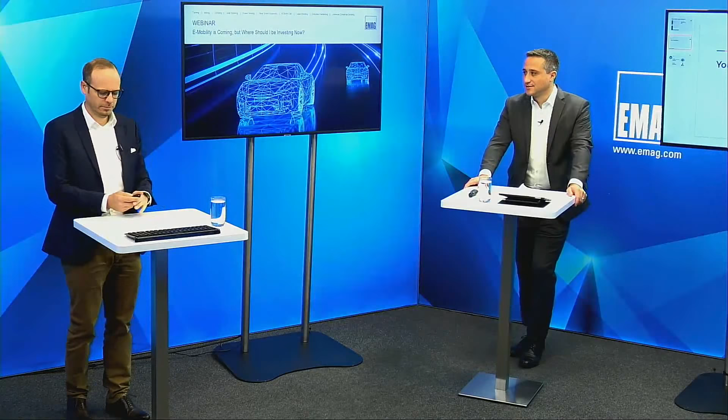Thank you, Nico. So also a very warm welcome from my side. And I will go through the agenda about the development of the E-Mobility. Part of the E-Mobility is the rotor shaft, the stator housing, as well as the E-drive transmission parts. And we will also have an outlook on the brake disc.

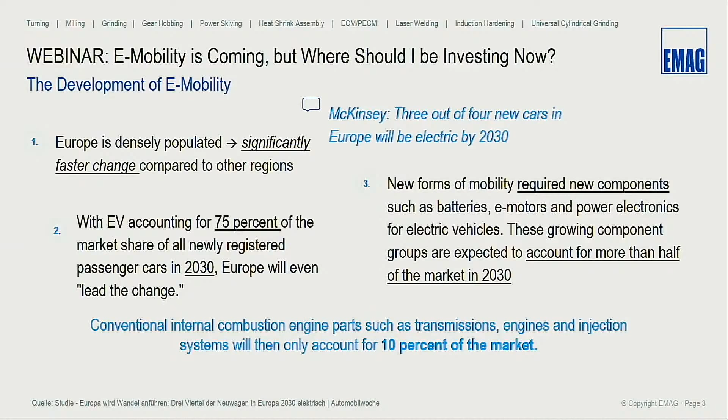What McKinsey is saying is that 75% of the market in 2030 will be electrical cars. So there will be a fast change from the current engine to E-Mobility, the main components of which are the batteries, the e-motors, the power electronics, and so on. And this will be half of the market in 2030. As you maybe know, for example, Mercedes-Benz already stopped their developments for conventional engines, so they will focus definitely just on going to E-Mobility.

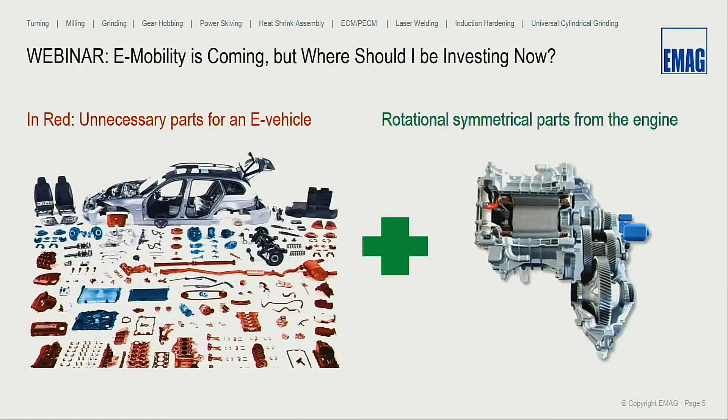So we will give you now the overview of what EMAG can supply you there. The electrical motor has the relevant parts of the stator, the rotor, the stator housing, as well as the transmission. So EMAG focuses more on the rotor, stator housing, and the transmission parts. First.

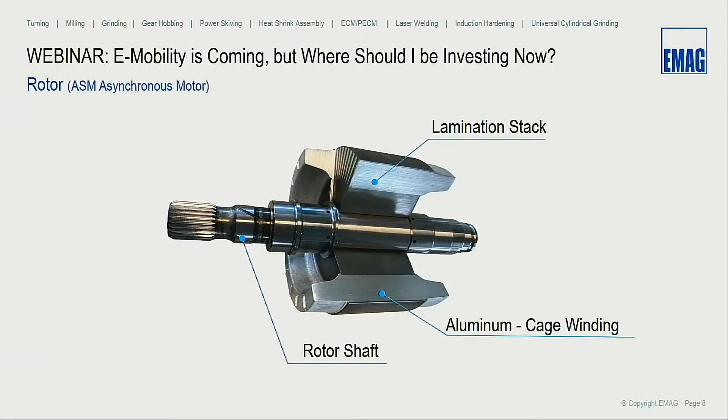As I already said, we will have a detailed look at a rotor shaft and a rotor shaft manufacturing solution we already provided to our customers. So here we have an asynchronous motor which consists of a rotor shaft, a lamination stack, and the aluminum cage winding here. We see clearly in the market that we have two different parts of designs of the rotor shaft: a solid shaft and a hollow shaft. The solid shaft mostly consists of one piece, and the raw parts are made of sawed-off parts and formed parts. The finished part will sometimes have a running teeth or a spline, or a combined version of it.

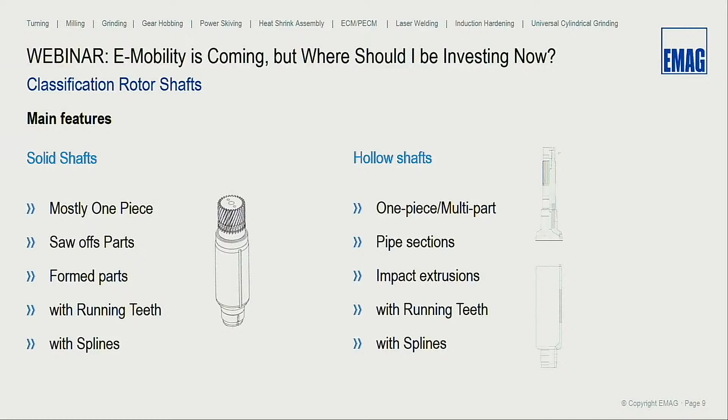A hollow shaft is sometimes a one-piece solution, but there are also solutions or designs on the market for multi-part, meaning you have 2 or 3 parts which get joined together into one rotor shaft. The raw parts are pipe sections or impact extrusions, having a running teeth and a spline on the inside or outside of the rotor shaft.

And here in particular, we will show you a process chain of a multiple piece solution. We have here a 2-piece solution of it: an upper part and a lower part as the raw part. Then we're starting with the first turning operation, turning the OD and ID of each part, going on to the second turning machine, doing the same on the rough surfaces there.

Afterwards, we go to the laser welding station. We have there a laser cleaning and joining station to prepare the welding surface and join both pieces together. Afterwards, we weld both parts together, and after it's one piece, we go to the induction heating and hardening.

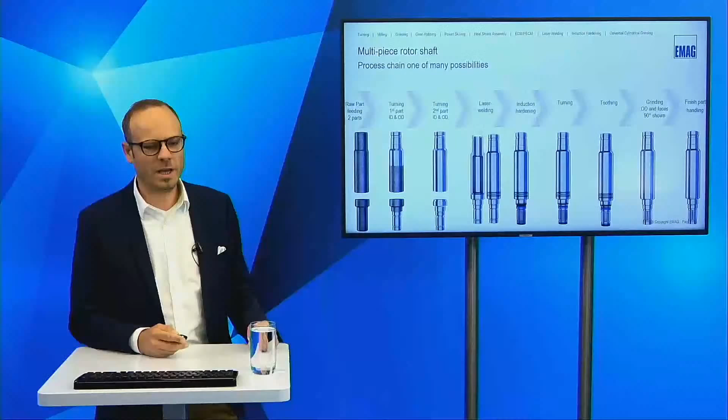Then we're doing the hard turning of the rotor shaft. We're doing spline toothing and grinding due to the tight tolerances at the end of the line, and we have a finished part handling and stacking cell in this case.

So I will show you now the manufacturing line, how this looks. We have on the left side the raw part feeding with some conveyors where the operator can bring on the workpieces and feed them to our track motion linear system.

The track motion linear system moves the workpiece to the first operation, op10, and at the same time takes the finished op10 part, flips it over and brings it to the op20 machine, where the other side gets machined. As soon as the part is finished, the track motion system takes it and brings it onto the conveyor on the upper side.

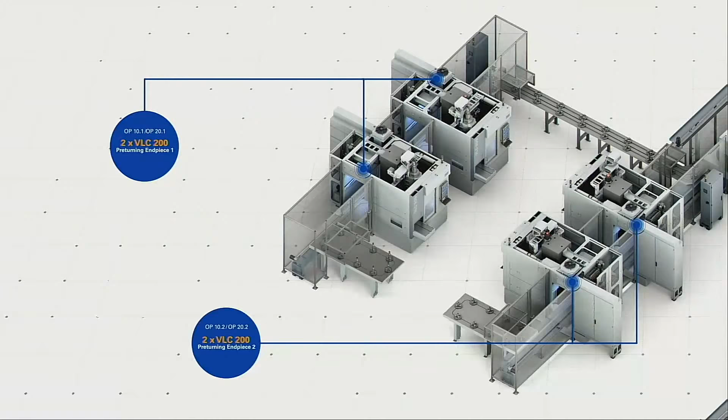So the upper line is for workpiece A, and the two machines on the bottom are for workpiece B. Then the conveyor and its workpiece carrier brings the workpiece to the next cell of the line.

We have here the LC4 laser cleaning machine, which does the laser cleaning and joining of both parts together. The gantry system brings the joint but not yet welded part to the ELC 160 and does the laser welding here so that both parts are safely connected to each other.

Afterwards, the gantry brings it to the robot. The robot feeds the eldec MIND 1000 machine for induction hardening, and afterwards the part is hardened. We bring the part to the conveyor.

This is the connection between the upper and the lower line, where we have our VTC 200 center drive machine that lets you clamp the part in the middle of the OD, turn the upper part of the rotor shaft and also the lower part of it, so that you have a new basis.

Due to the hardening, you will have some deforming, so now we are doing a new centering, so that the grinding machine at the end of the line has a good basis to reach the tight tolerances.

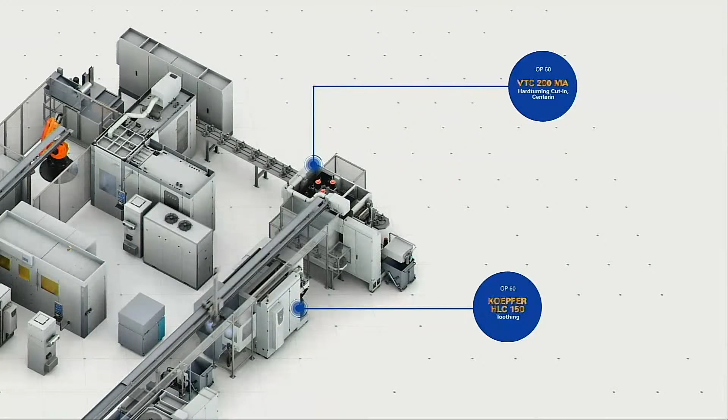The gantry system will pick the machined rotor shafts out of the VTC 200 and bring them to the Koepfer machine, where we mill the toothing onto the rotor shaft.

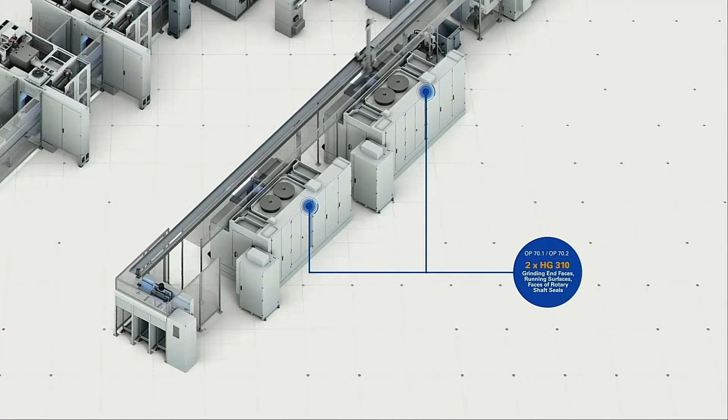Afterwards, as I already said, we will grind the rotor shaft on an HG 310 machine to its final tolerances. And the stacking cell at the end lets the operator easily remove finished workpieces and bring them back to the line.

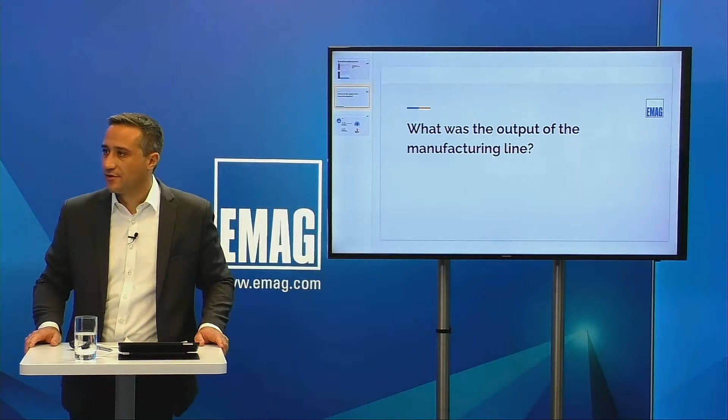Michael, may I interrupt you? I want to take the chance - I've seen there was a further question regarding the output of that line. Can you give us a brief overview about the output of the line?

Yes, for sure. The output on that particular line was 360,000 parts per year. So it's a good size for a manufacturing line, which makes definite sense to have a connected line for this high volume. I hope that answers the question.

So then I want to take the chance and continue by giving you a better overview about potential projects for rotor shaft welding. We've decided to put two different possibilities, two different machines, into this presentation.

The first overview you see here is a summary for a request for a laser welding machine, which has to be focused on truck rotor shafts as well as passenger car rotor shafts. You can simply see the overview here.

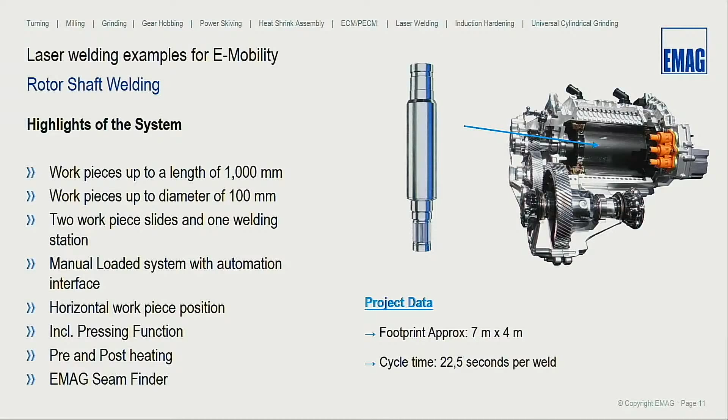The request was for a machine with the possibility of up to 1,000 millimeter length as well as 100 millimeter in diameter. The request also included a joining solution or joining function in the machine, including preheating and post-heating, and due to the pretty tough or tight tolerances in the two single rotor shaft components, we have also implemented a sensoric system which checks the position right before we start welding.

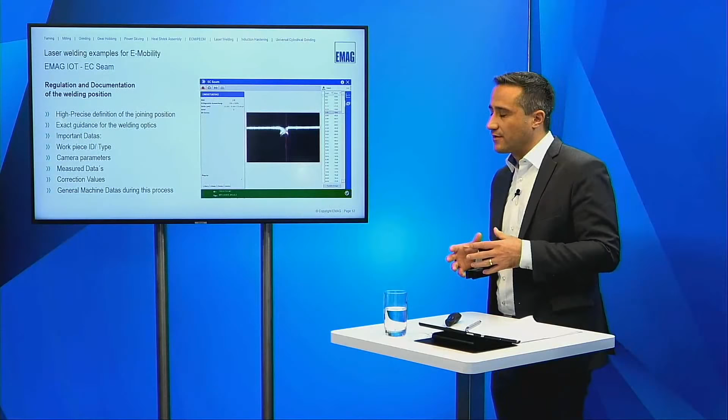I want to continue with this function because it's a very unique and important function in a laser welding machine for rotor shafts. We have designed and developed a system called EC seam, which means EMAG controls the seam. So we have a seam detection.

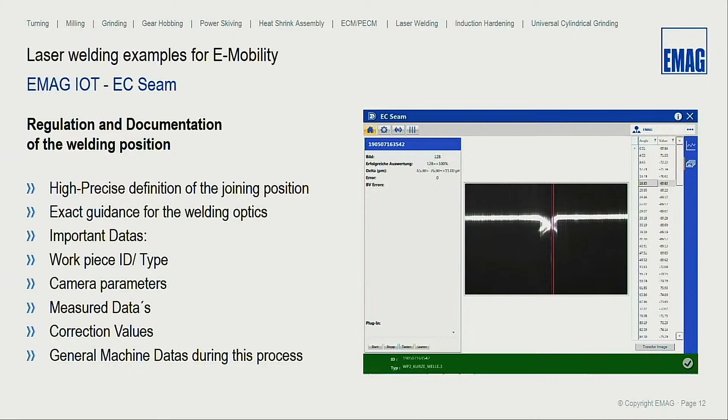This seam detection camera is mounted next to the optic, and we use it to control the two different workpieces and try to find the right or middle of the weld seam. You can see it on the left side - this is the diameter, meaning we are checking the tolerances at the end of the day, the run out.

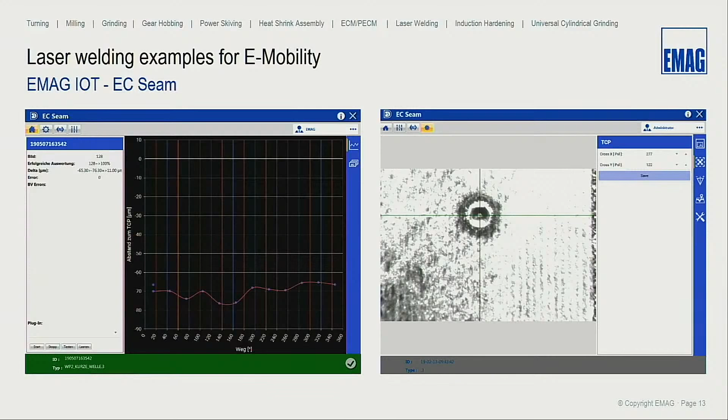This information is directly forwarded to the machine, and the optic has an NC controlled axis. This NC controlled axis is moving during the weld seam to be 100% sure that we are always in the middle of the two workpieces with the weld seam itself.

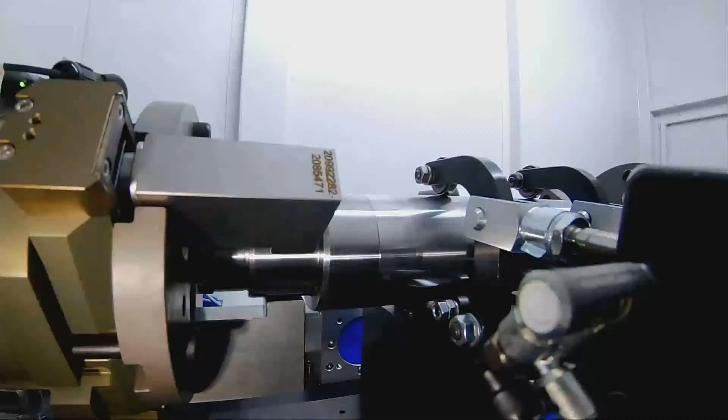This is completely force and weight controlled. Then we move the whole slide into the machine, and we start by using our EMAG eldec equipment to preheat the workpieces with an induction coil, completely controlled.

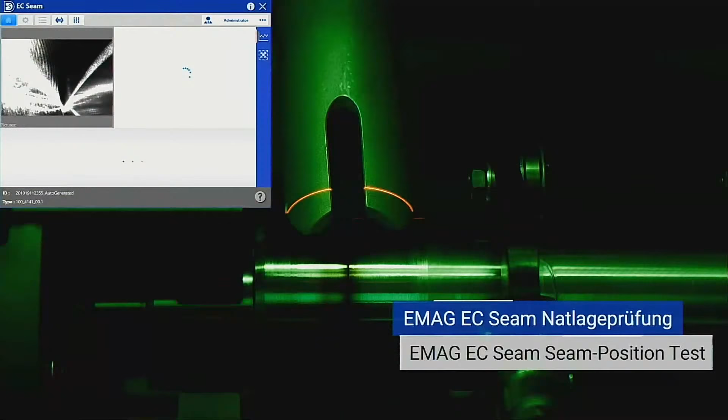Now the workpiece has its perfect temperature, and we start by finding the seam position, as I mentioned. So now the machine knows where to weld, and the weld operation starts immediately afterward. Then the slide moves out of the system to the right side.

It can then be manually unloaded, and at the same time, as you see in this picture, the left side slide is moving into the machine. So it changes between slide left and slide right to reduce the change-over time, the time between manually loading and unloading, down to a minimum.

That's a huge machine, developed especially for rotor shafts for trucks as well as passenger cars. We also have a more compact possibility, a line focused just on passenger rotor shafts, and this line is standing right now in our plant.

Last evening I walked through the company and saw that we are close to starting the programming of the whole system. You can see on the left side we have a conveyor system, which is responsible for bringing in the two single parts as well as bringing out the finished part.

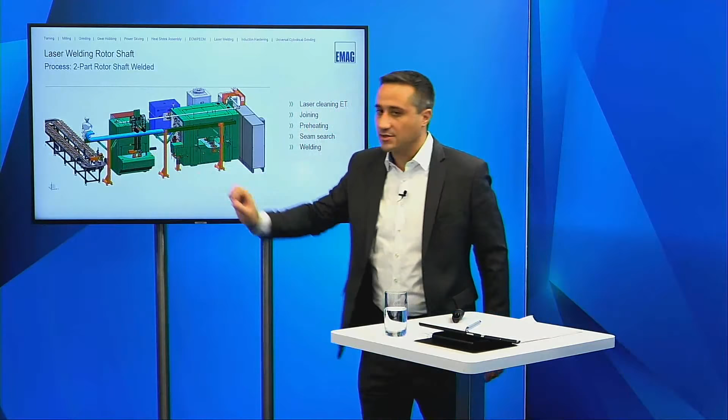The handling system picks up the two single parts and moves them directly to the laser cleaning machine. The laser cleaning machine as well as the laser welding machine have an indexing table function, so loading and unloading happen in parallel to the machining time.

We start by cleaning the two workpieces. After cleaning, we move directly to the welding machine, where we have the same functions as in the horizontal one. First we press the parts together, then find the seam, or the position where we have to weld, and then start welding.

It's a very compact solution, and we at EMAG are able to include in this whole line also the pre and post machining processes. In general, it's a complete manufacturing system.

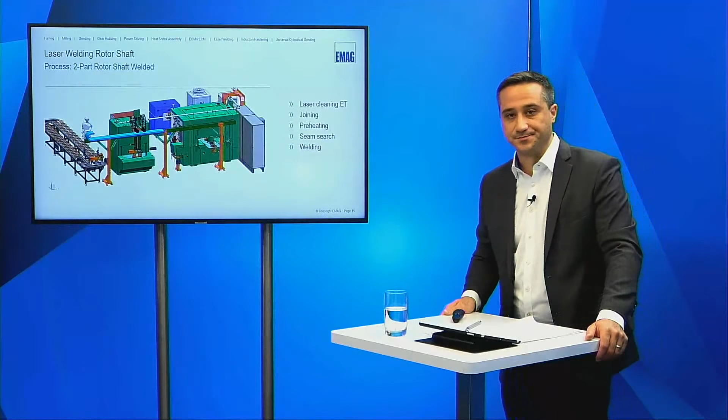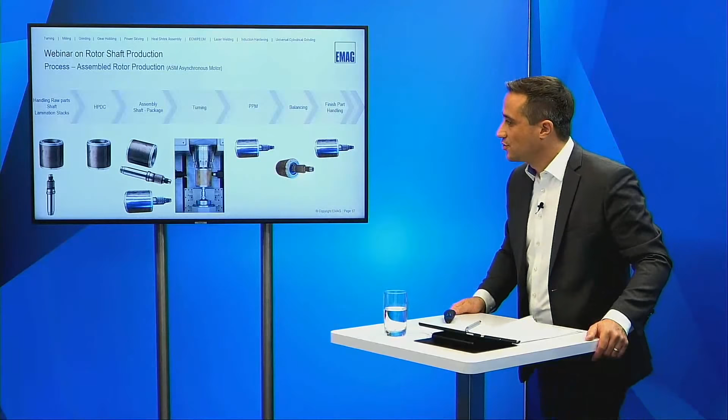Continuing, imagine the rotor shaft has been completely manufactured and finished. Then we continue to bring the rotor shaft together with the blank sheet metal package. Here you see the bill of process for the assembly line.

After assembly, we have several functions like turning, post-process measurement, as well as balancing. Afterward, we can take the finished parts into a stacking cell or whatever is needed.

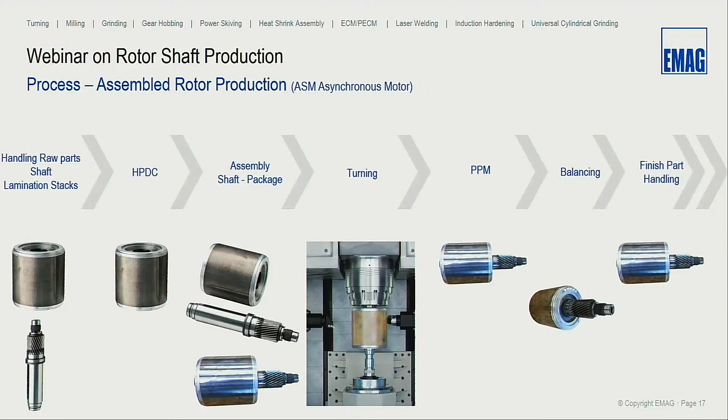And here the interface is later on a conveyor system with pallets, and we have been focused on this function in a more detailed way. Our responsibility was to preheat the blank sheet metal package, bring the rotor shaft together with the blank sheet metal package, which means to join them in a time of 50 seconds.

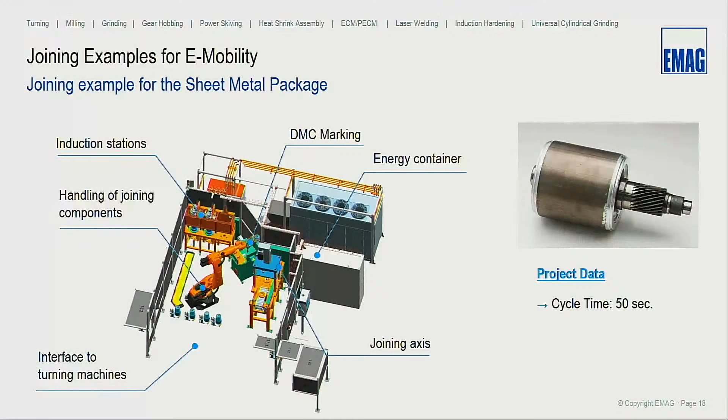To give you a better overview, here we have used some fixtures instead of the conveyor system, which is implemented later on. We put the blank sheet metal package into the fixture for the preheating function. We are also using the EMAG eldec equipment to preheat the parts with induction.

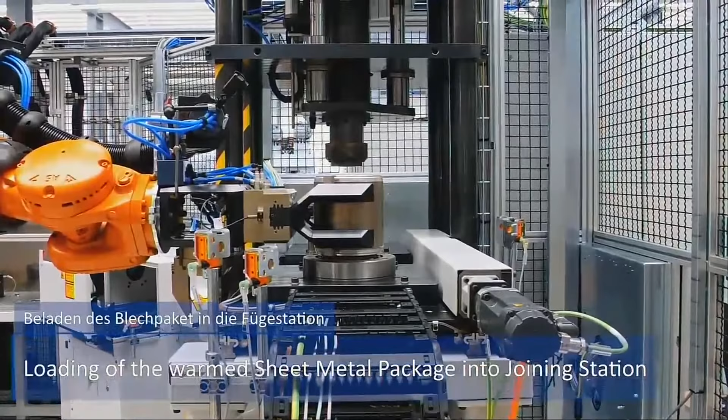In parallel, the robot is picking up the rotor shaft, moves it into the fixture of the joining position. We move it underneath to be sure that now the blank sheet metal can be positioned in the very right way. And then the NC axis is moving underneath the joining punch socket.

So now here we have a fixture, and the rotor shaft is now pressed into the blank sheet metal from underneath through the blank sheet metal package. And at the end, that was it to bring those two parts together. Then the robot moves the part out and back onto the conveyor system.

After we have joined the parts together, as I mentioned in the bill of process, we have the post machining, and I want to take the chance and hand over to Michael again. So as you can see here, we have the turning operation in the video.

We're doing the pre-machining with a conventional turning, and afterwards we're doing it with our scroll-free solution. That means we have this tool here, which you currently see in the video, and you can compare both datas on this table here.

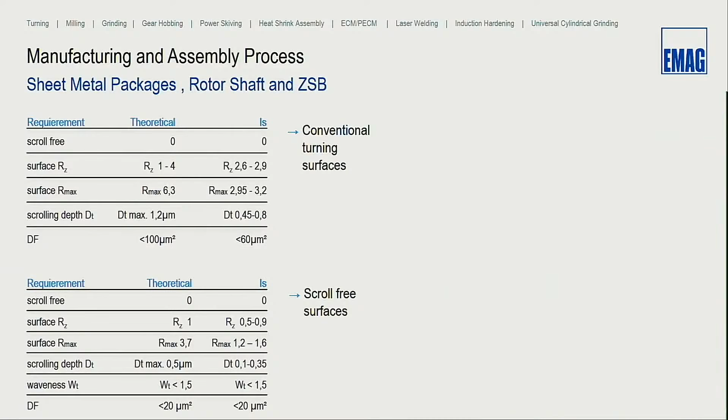Underneath here, it is clearly to see that the scroll-free turning gives you quite a lot of benefits. The surface itself is absolutely fantastic for turning. We have here a surface and the scrolling depth is also very good, which is important for a cast rotor. Also the waveness is very important for these workpieces.

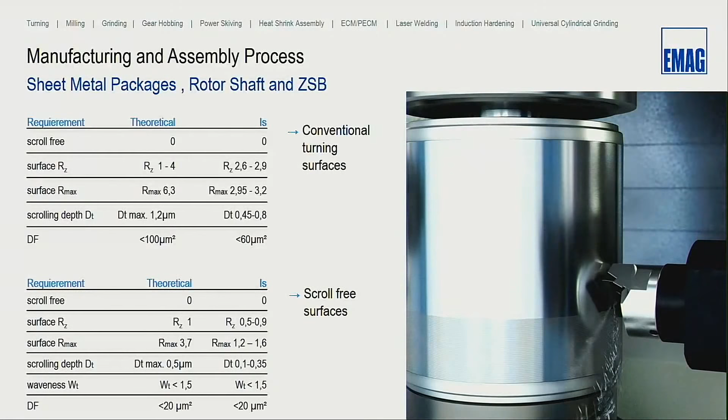The scroll-free turning has the benefit of the tolerances we can achieve, but also you have a very good tool life. The tool life itself is important, probably not here for this sheet metal package, but usually we use this turning process also for hard turning parts. And here it is more important to increase the tool life of the tool, which means you have a higher outcome, a higher output in your manufacturing system.

As we all know, the electrical drive has an absolutely minimum noise level. That means all the parts around need to be in a very good condition, and therefore it's also necessary to have all the gears and the teeth grinded very, very good, so that you do not recognize all these noises in your car.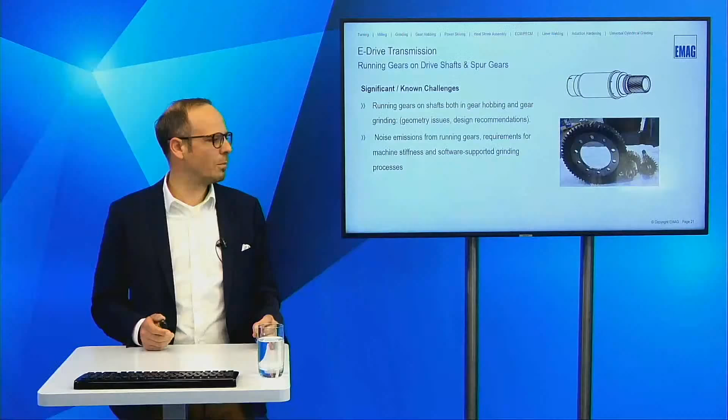Currently, with the conventional engine, you hear the motor running, but not the teeth going into another tooth. But here, with the E-motor, it is completely different. That means we have here the solution of grinding these gears, and also, which is important, the running surfaces for the rotor shafts.

And here we have our EMAG Samputensili G250 high-speed machine, and you can see in the video how the grinding process will run. In this example, for sure, it's running without coolant to demonstrate how it will work.

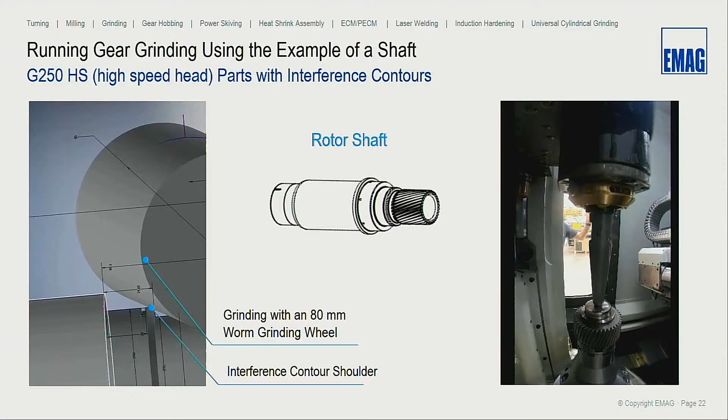Just a little hint for some designers, if they are looking today: it's important to have some free space so that we can run out with our grinding wheel, so that we do not have interference on the shoulder, a crash or something like that, and that it's possible to machine the teething perfectly.

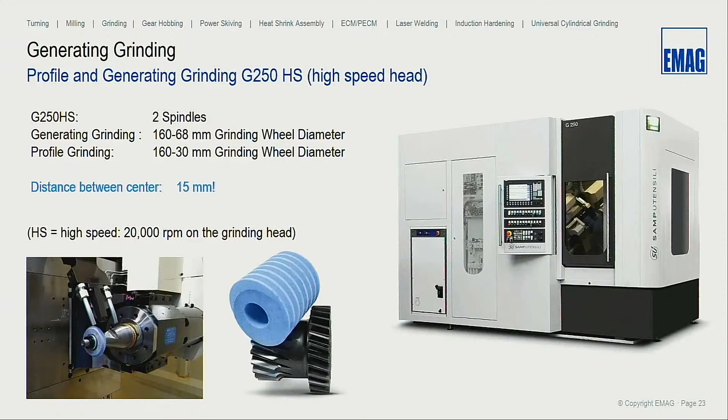So here you can see the machine. We have 2 spindles in it. Do you see the range of what kind of wheels we can bring onto the machine? High speed means in this case that we can run the grinding head by up to 20,000 RPMs.

Michael, just one more interruption before we continue with the next line item. There was a previous question regarding how long the preheating time was for the cast rotor. I think that's a question to my direction. The preheating time for the blank sheet metal package is approximately 70 seconds.

As I've presented, we have a cycle time for the assembly line of approximately 50 seconds, which means with 70 seconds preheating time, this is why we decided to implement 2 preheating stations, and therefore we meet the cycle time requirements. It was an induction coil developed for the inner as well as the outer diameter in parallel, so we have a chance to bring in the heat in a very homogeneous way. The answer is 70 seconds.

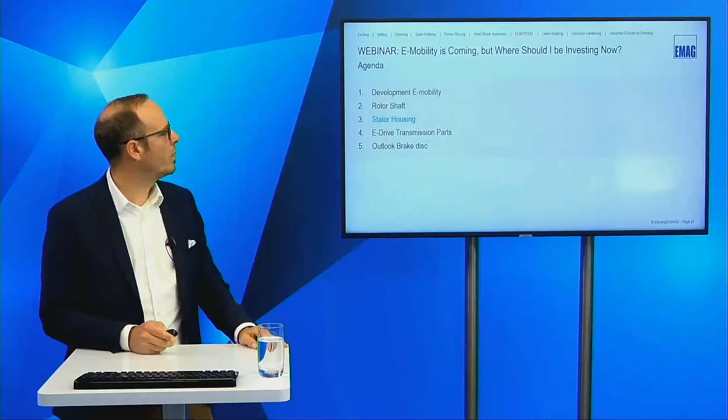Okay, thanks Nico. So now we will move to machining stator housings, and one project we already implemented for our customer was an aluminium housing with an outer diameter of 260 and a length of 280 millimeters.

The requirements there were a surface of RZ12 down to RZ6.3. The diameter tolerances were from 45 microns up to 200 microns, eccentricity 80 microns, and roundness 60 microns.

So for this big part, we have a solution with our EMAG VDZ 420 XL DS machine. You can see here in the picture the version without the guarding.

To bring it a bit closer to you, we have here the conveyor, which brings the workpiece to the back of the machine, where the NC loading gantry can take the workpiece onto the NC rotary table. This rotary table brings the workpiece to the working area on the left side, so we have two working areas, one on the left and one on the right. This allows a combined operation: op 10 on the left, op 20 on the right.

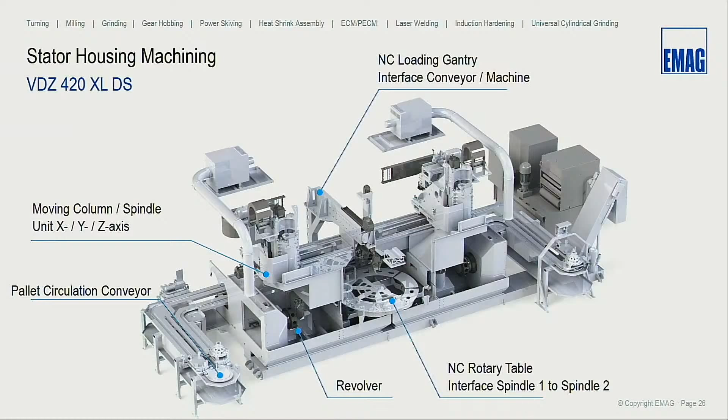After all the machining, the parts go out, and we have here the moving column and the spindle, and the unit can move in all 3 directions, which is absolutely unique on the market. We have the Y-axis with plus minus 140 millimeters of movement, which gives a good range of flexibility to machine your parts. Now I would like to show you how this was implemented in our video.

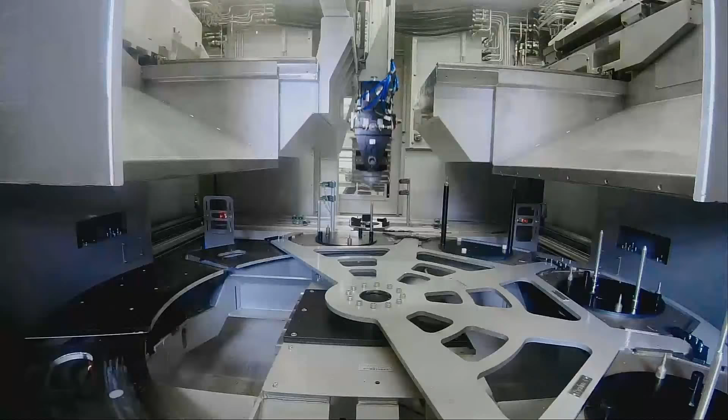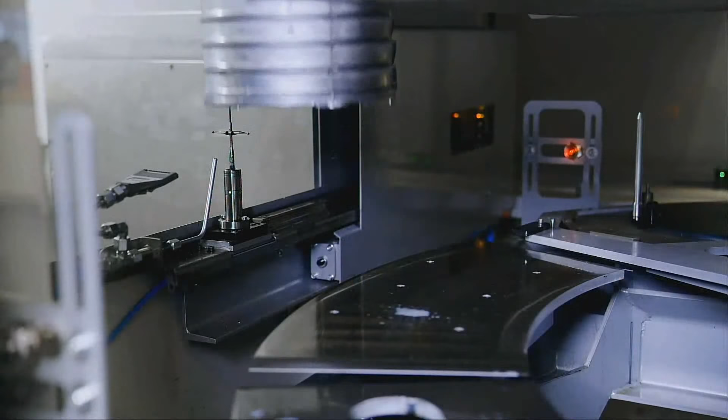The workpiece was loaded here in our facility by hand, though you can also do this by robot or gantry. The gantry loads the part onto the rotary table, which moves then to the op 10 working area. The workpiece gets clamped, the zero points are set, and the op 10 operation starts to machine the parts with all necessary features, including pre-machining for clamping on op 20.

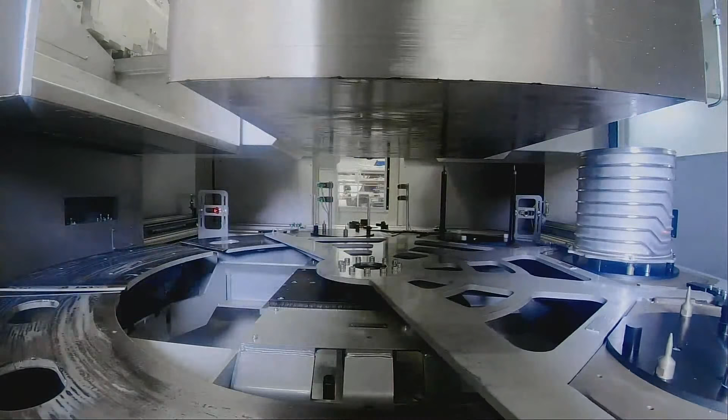Afterwards, the part goes back to the rotary table, and the rotary table moves to the middle. The gantry grips the part and flips it upside down on a separate position, to avoid swarf and coolant getting onto the workpiece carrier on the rotary table. Now we're clamping on the OD.

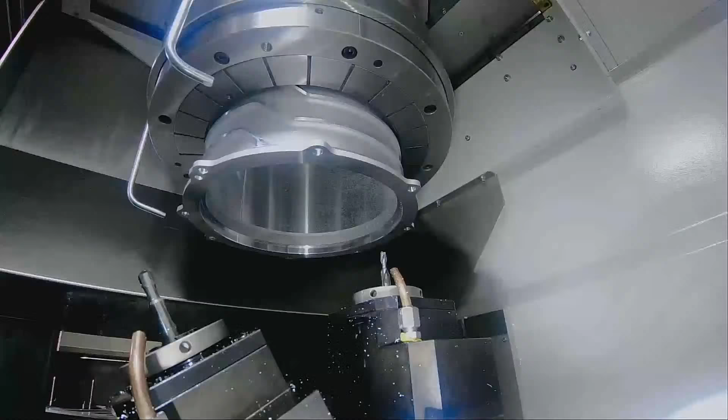The reference was machined before on the OP10 working area, and now we're doing the machining here for OP20. So we can do turning, drilling, milling — everything needed for the workpieces.

We have the probe as well to check if the part is in good quality, and afterwards we bring the part out of the machine, back to the workpiece carrier, and it goes to the next process for unloading or whatever else is needed.

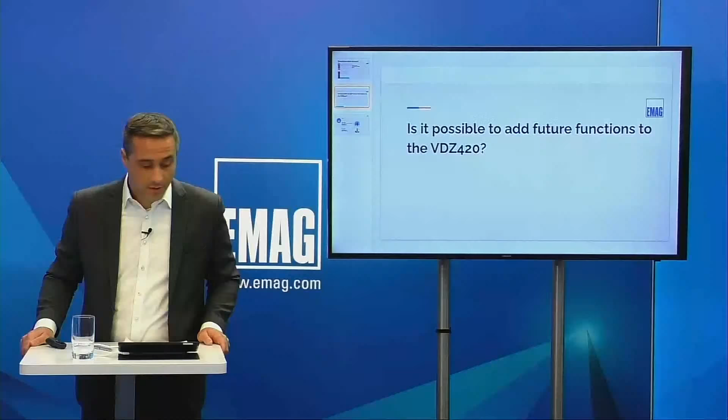And here also, Michael, one additional question regarding, as I understood, additional functions in the machine — is it possible to add further functions in the VDZ420?

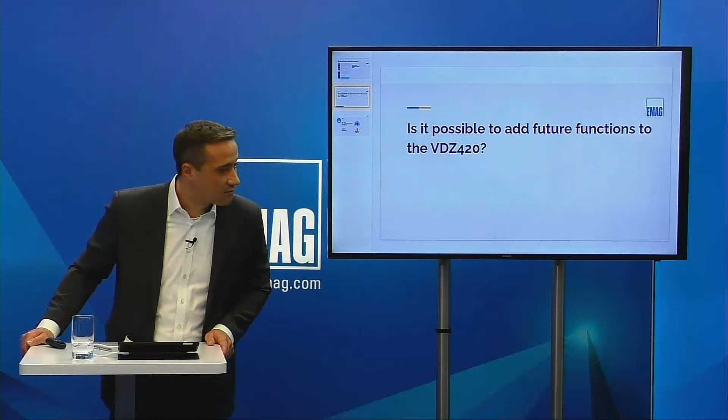So let me go back to this slide. As far as I understand, the question is about adding further functions. As you can see here on the working area, we have the revolver, and here you may also see the milling spindle, which can be vertical or horizontal — quite impressive.

We can add an HSK 63 milling spindle, meaning we can bring a good milling process with high torque. It's also possible to increase the X-axis of the gantry to add additional functions at the end of the machine, for example a blow-off station, a brushing station, or a CMM to measure the parts in a more complex way than shown in the video with the probe. So there are quite a few functions that can be added to this machine.

Hopefully the question was answered. Good, yeah, so thank you.

Then going to the eDrive transmission parts — Nico, it's a big part for you. Thank you very much, Michael.

We decided to show you a very nice Porsche Taycan, not because it's a very nice Porsche Taycan, but because it has a very interesting electromotor underneath, shown in the picture on the right. The idea from our perspective was to share some potential out of electromotors.

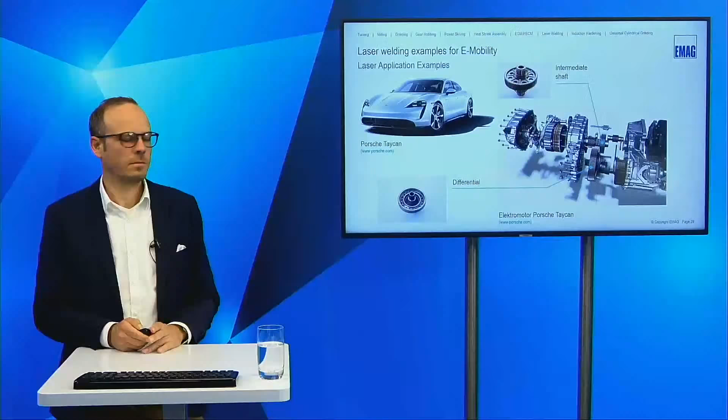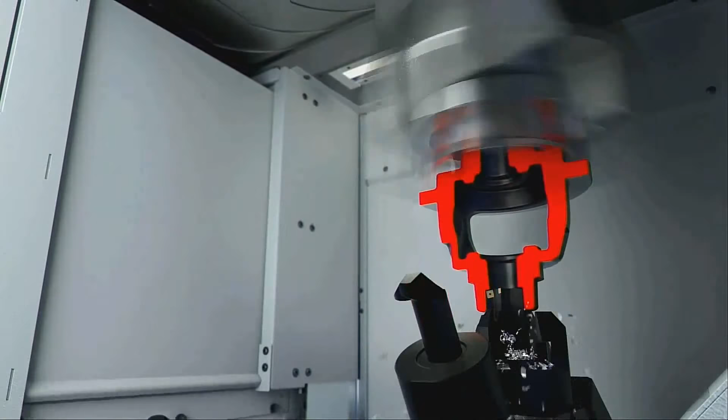As Nico said, we need to machine the parts before we can join and weld them. So you see here an example of a manufacturing line for those differential part housings. Here you see again our TrackMotion system, which connects each operation to each other by transporting the rough and finished parts. See here the turning operation at OP10 to machine all necessary features, as well as preparing the clamping surface for OP20.

The TrackMotion takes the finished part, brings it onto the shuttle. The shuttle moves back to the machine and the spindle picks it up from there. And we're going back into the working area for the next side machining.

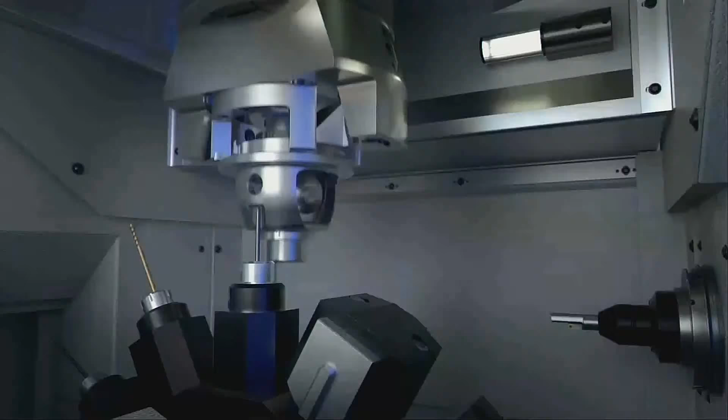The TrackMotion takes the part, brings it to our VSC 250 DDS machine, which is special with a horizontal milling spindle, which you can see here on the right-hand side. We have here the machining and drilling of all these parts, and inner turning, which is nice to see how the tool comes into the workpiece.

So you get an idea of how to machine that part and what is possible on EMAG machines. It's not just easy turning we're doing, but some complicated stuff as well, and I think you will find a good partner in us.

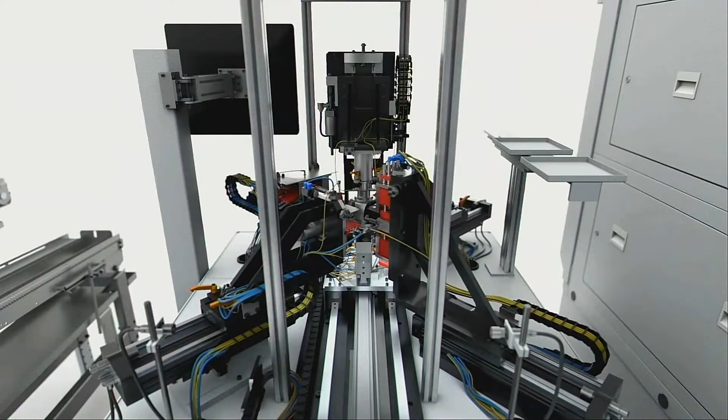So in the last operation in this machine, the workpiece is going out. The drag motion grips the part again, brings it to a blow-off station on a rotary table so the part is perfectly cleaned. And now we are doing a 100% measuring on a separate PPM to check all features. As long as the part is good, we're going onto a conveyor and bring the part out of the line.

However this would like to look, you can connect this automatically by robot, by gantry, by a conveyor system, or you have operators which will pick the parts in some boxes and bring it by hand to somewhere. So we have the possibility to integrate anything that is needed and requested. And as Nico said, now joining those parts together, he will give you an overview of how this will work.

Thank you, Michael. So somewhere means you can directly continue by bringing the workpieces together, the gear as well as the differential housing. In this video and example, you can directly see how these Porsche Taycan differentials have been laser welded.

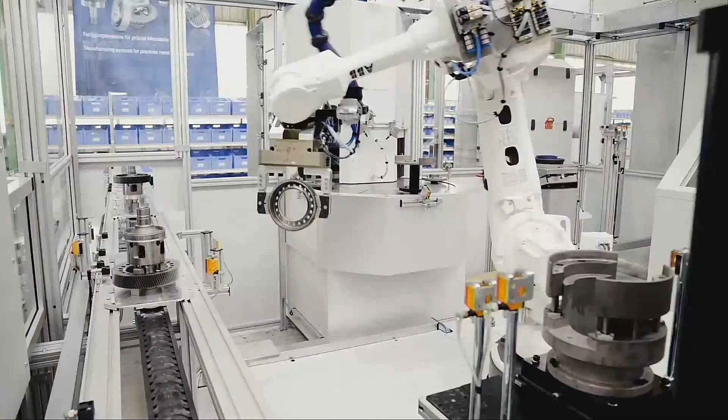We first start with the laser cleaning operation. We put the two single parts, which are quite heavy for this special project, into the laser cleaning machine. On the left upper side, you see there is also a control checking system during the cleaning process. We clean both workpieces with a scanner optic, so the workpiece is moving and the optic is fixed. This way we can be sure that both parts have been cleaned before we start pressing the parts together.

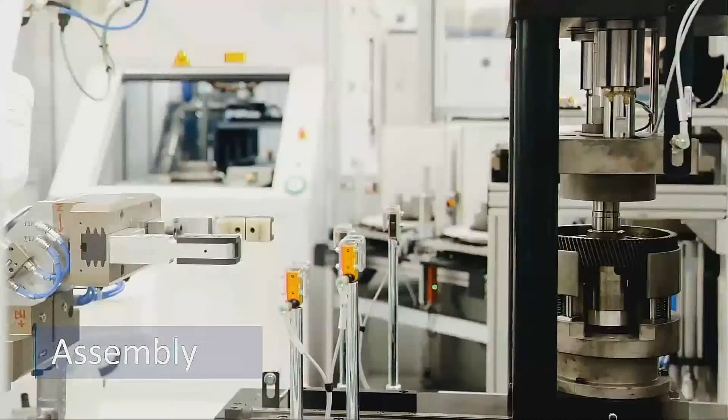Such components need an additional separate pressing function due to the fact that the force to bring the two parts together is pretty high, up to 200 kilonewtons. So it's also force and way, or path, controlled.

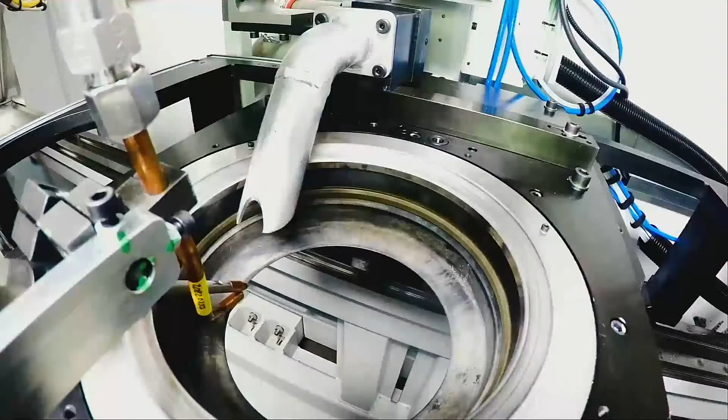After pressing the parts together, we move it directly to the laser welding machine, which has a chuck underneath. Here we bring the parts underneath the counter bearing, so-called, and then we start welding, in that case with filler wire and shield gas. Also here the workpiece is turned, the optic is fixed, and then we move the workpiece out of the system.

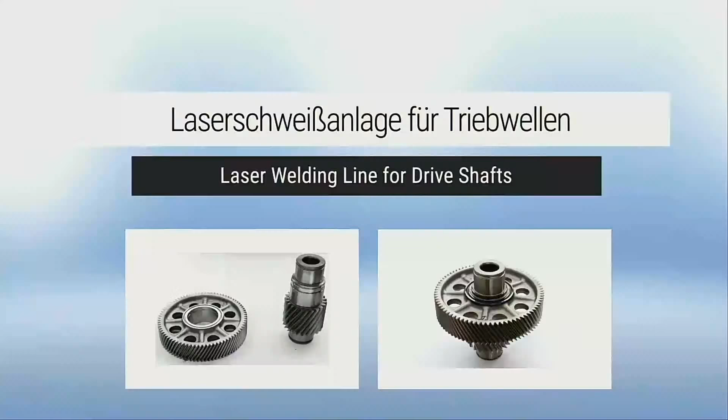At the end, it always depends on our customers' expectations or requests how to continue or proceed. So sometimes, or pretty much very often, we have brushing units after the laser welding station to be sure there are no spatters on the welding surface, as well as ultrasonic testing equipment, which is also developed by EMAG, both software and hardware. So there are quite a lot of possibilities, and as always, I ask you as our customers to give us your requirements to fulfill. To continue, we decided to show the whole line.

That's the second workpiece assembled in this Porsche Taycan electromotor. And we start pretty much the same as for the differential. So we unload the workpieces from the conveyor system. Here we as EMAG have delivered a fully running system, so everything was up to our responsibility.

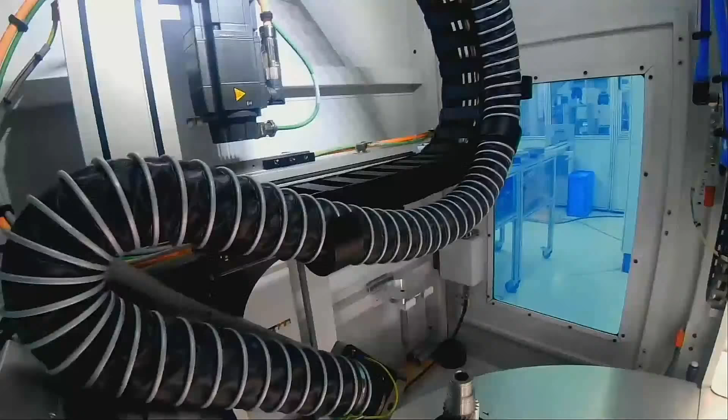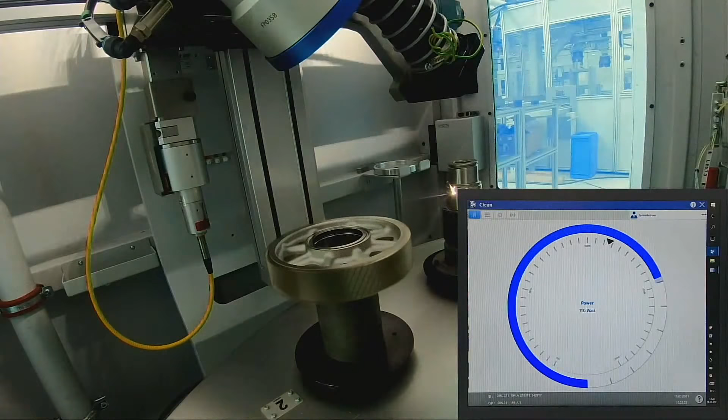So first of all we clean up the workpieces, similar as for the differential. The workpiece is turning, the scanner optic is fixed, cleaning up the surface where we are first joining and then welding the parts.

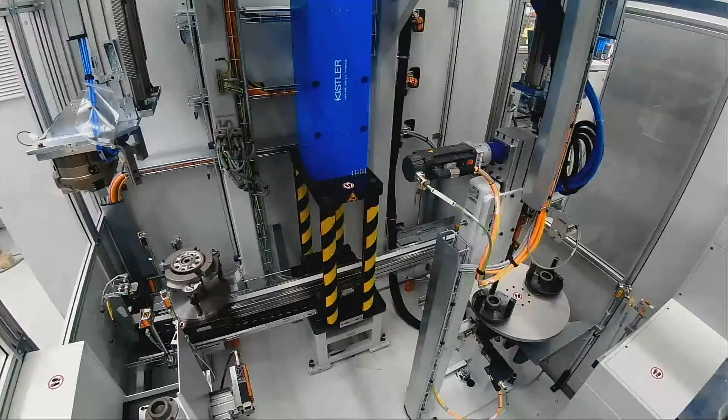The first handling picks up the two single components and moves them onto a fixture, a kind of slide between handling number 1 and handling number 2. In between, we have put the pressing function into the line, up to 200 kilonewtons pressing force. And due to the tremendous high quality requests, as well as because of the material, we have implemented an induction preheating station. Here you see the induction coil for both inner and outer diameter, to bring a homogeneous temperature into the workpiece, so it is also turning.

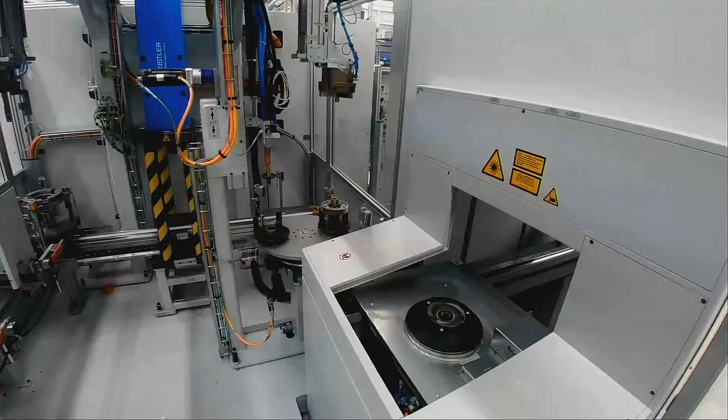After we have finally received the defined temperature, we move the workpiece into the chuck of the welding machine. Here you can see it. Now we clamp the workpiece pretty accurately, and then we move it underneath the counter bearing. Here you can't see the workpiece - we have just opened the area where we are welding the parts together.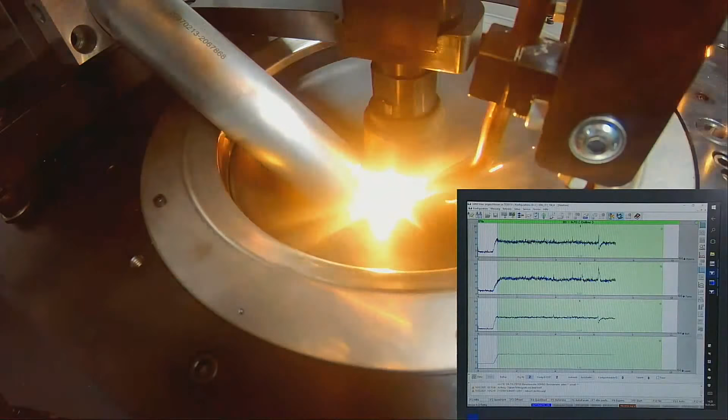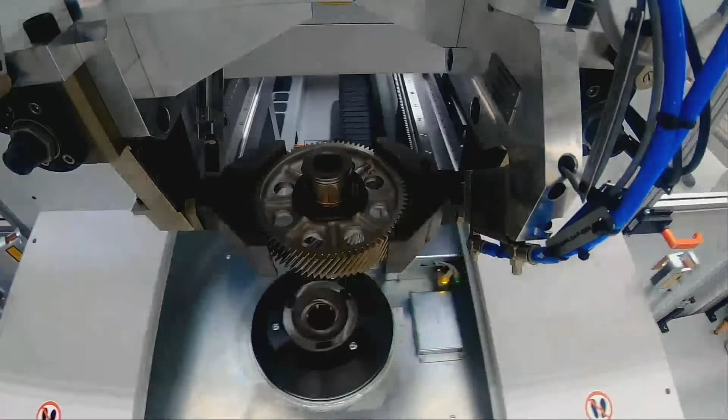The welding process itself is also monitored, as you can see on the right side. The workpiece was turning, we put it on the laser seam itself. And because the laser seam was open during the process, we have implemented a brushing system which brushes the laser welded surface to be sure there are no spatters on the surface.

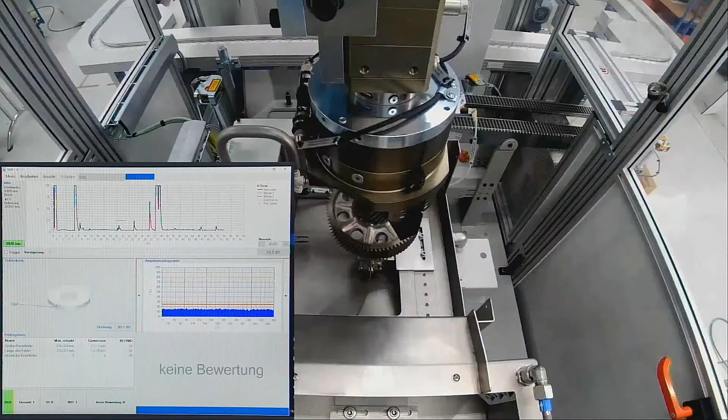The second additional function to check the quality of the welded part is an ultrasonic testing equipment. First of all we press it up to be sure we are in a repeatable position, and then we start turning and using the ultrasonic testing equipment to look into the weld seam to be sure there are no cracks or blowholes. So it's a typical 100% measurement after we have welded the workpieces, and this gives our customers the insurance that the quality is as good as they expect.

I have seen a further question during my presentation or during the video. There is one question: which power does the laser or the cleaning laser have?

We as EMAG decided to use a 200 watt pulsed laser, combined with a scanner optic. We decided not to use a lower powered laser, or for example a marking laser instead, because we are convinced that the quality expectations at the end are just fitting with a higher powered laser, and this is why we decided on a 200 watt pulsed laser.

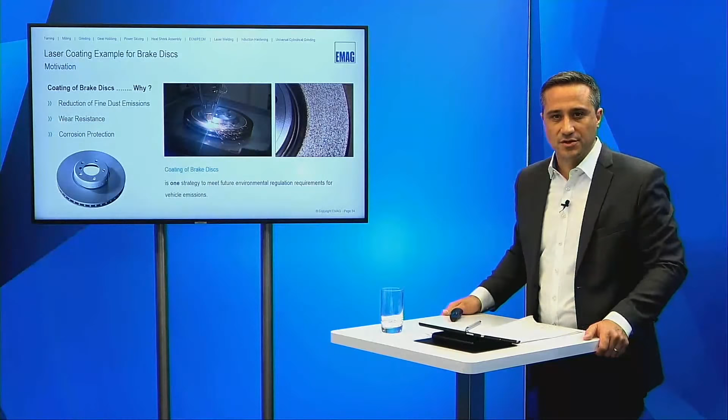The next two slides are, from our perspective, the idea to give you some news out of EMAG in regards to laser coated brake discs. We decided to have an additional and separate webinar pretty soon in November. Why do I mention that? Why is EMAG focused on coating of brake discs?

The answer is pretty simple: because of government expectations and rules regarding reduction of fine dust emissions, laser coating the brake disc is one of the answers. It provides wear resistance as well as corrosion protection, and we as EMAG are convinced this is one of the answers to meet future environmental regulations. For sure there are also other possibilities to reduce that by using other systems, but coated brake discs will be one of the answers.

So what are we doing? This is shown on the next slide. A typical process previously was also a very nice EMAG turning line - we had OP10 and OP20 for turning, continued by fine turning as well as drilling. In between there is a verify or checking function. And what we have done is add the function of coating and finishing.

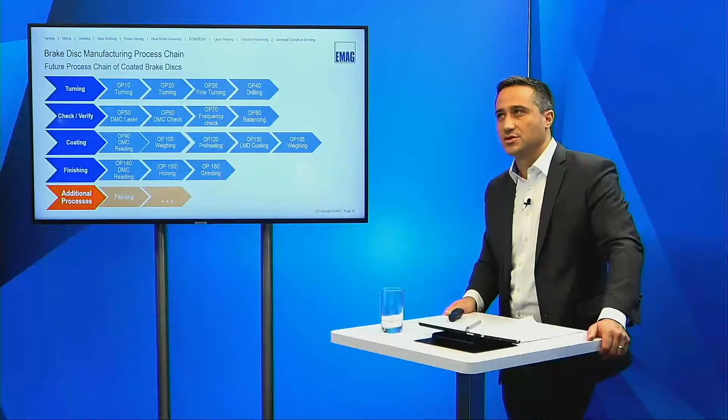Coating means we first of all include some checking functions as well - DMC reading, and a weighing function before and afterwards as an additional monitoring possibility to check the weight of the powder we have brought onto the surface. The laser metal deposition, so-called LMD coating, is a function we use to bring on a stainless steel powder onto the brake disc surface, to be sure it creates an anti-corrosion surface so that the brake disc behind will not rust.

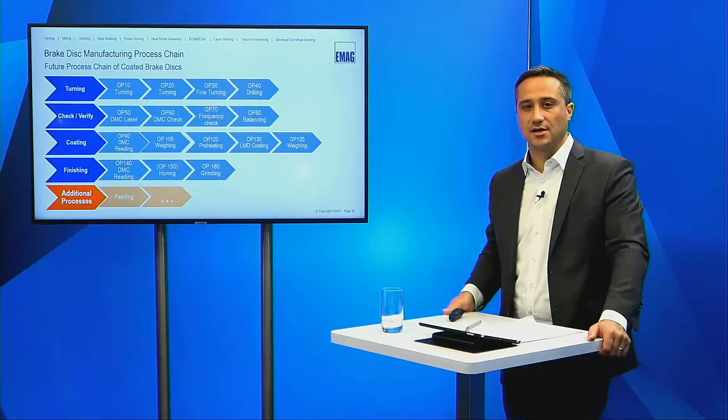And then we put a second layer onto it, a kind of powder with stainless steel and carbides inside, with carbide content approximately 30% to achieve the hardened layer on the brake disc. This is realized on both sides.

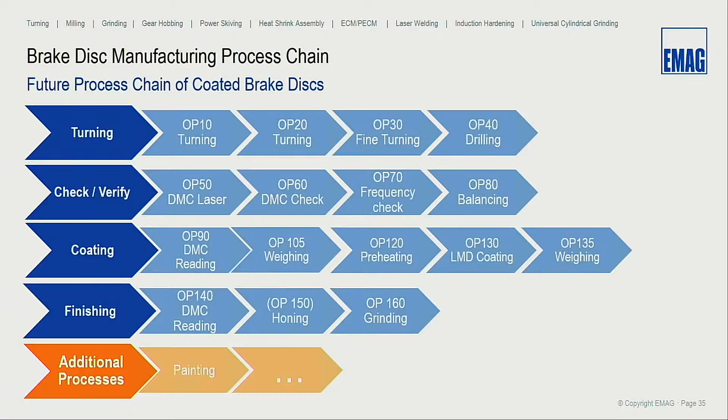Important to mention is that after we finish the coating, we directly forward the workpieces, the brake discs, into the EMAG finishing line. Here we hone and especially grind the surface. So grinding and laser metal deposition, meaning coating, are talking to each other. There are defined interfaces to be sure that we are not losing time and, at the end, tolerances.

And if those two lines are combined, which is what EMAG is willing to offer in general, then at the end you are having a much higher outcome. That's always the goal for such kind of lines.

Just two slides for the brake disc coatings. Again, we are having a more detailed webinar at the beginning of November, the 9th of November. I really want to motivate you to join, because there we go into more detail, showing you the motivation behind it, what kind of powders we are using, how a serial machine looks like. We also have the possibility to do testing in our application lab, to start with prototypes before talking about mass production. All of that information will be shared on the 9th of November.

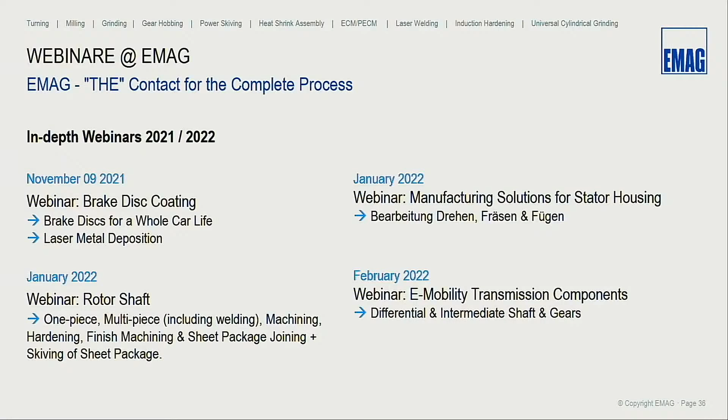To continue, we are having further webinars at the beginning of January as well as February. One is about the multi-piece, including welding and machining for the rotor shaft. We are also having a webinar for manufacturing solutions for stator housings, as well as, in February, e-mobility transmission components.

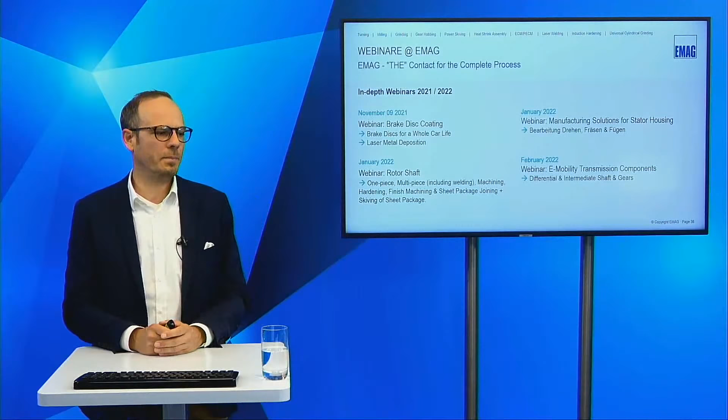Regarding what happens if market requirements become much higher than now: if we know something like that in advance, we can have spare space built in. That means in the line we can have spare space for a turning machine, a grinding machine, whatever else. Or if demand doubles or something like that, we will copy the line to scale it up. It's also possible to increase step by step, meaning have half of a full line, and then when another increase should come, we bring in the other machines. This is how we usually act.

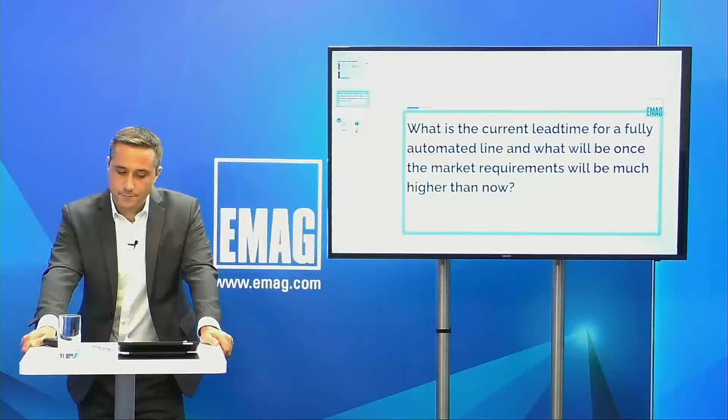You said that the coated brake disc is one of the brake disc solutions to meet environmental requirements. What other solutions are there?

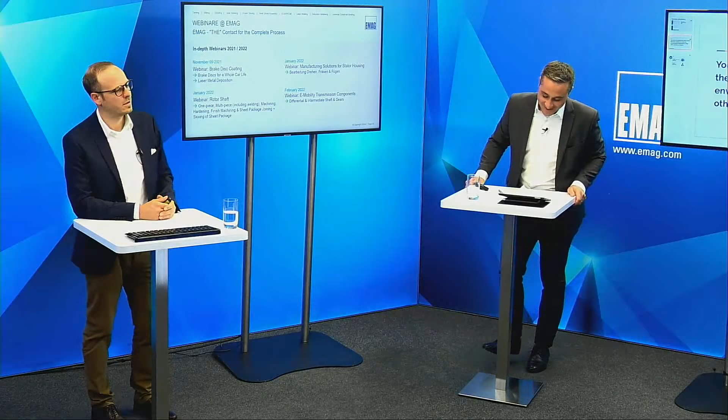Well, first of all, the recuperation of an electromotor has some positive influence on the braking system itself, and it also somehow depends on how big the car is. We also have an additional way of braking the cars, and that's a drum brake. So, thanks Michael, it's a drum brake, and our OEM customers use a drum brake to collect the dust, and during a service period they exhaust this fine dust during the service operation.

So there are several answers, drum brake is one of them, recuperation is another. From our perspective, and I'm pretty convinced this will come faster than we are expecting right now, depending on EU regulations, there will be an increase in coated or co-coated brake discs.

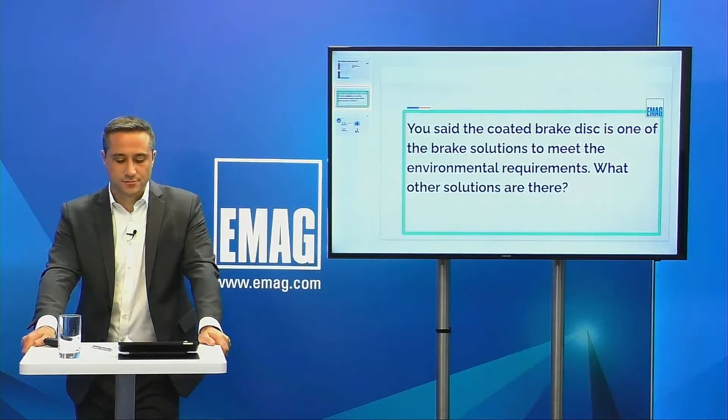So one question from my side, Nico, regarding the laser welding. Conventional welding is by wire. You told us that on the differential you also have wire. How do you do that with the rotor shaft?